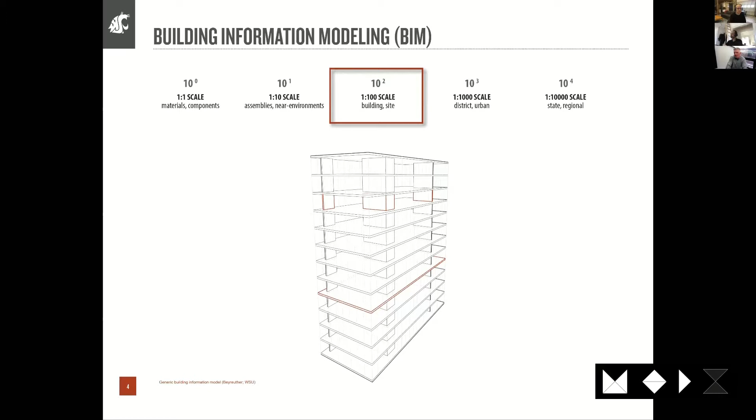So what is that appropriate balance between a certified assembly or an optimized assembly in manufacturing and still enable that creative freedom? And I know this is where I'm really interested in the modular world, where often we set those constraints early on. It shall be 14 by 65, right? Feet, right? To go down the road.

Yep. And then what we won't talk about so much today is a lot of our focus on both urban scale, on districts, on planning, and so forth, as we get into some of the new codes for mass timber, but then also that political level at the states and the bioregional level when we get into more of the environmental impacts and so forth.

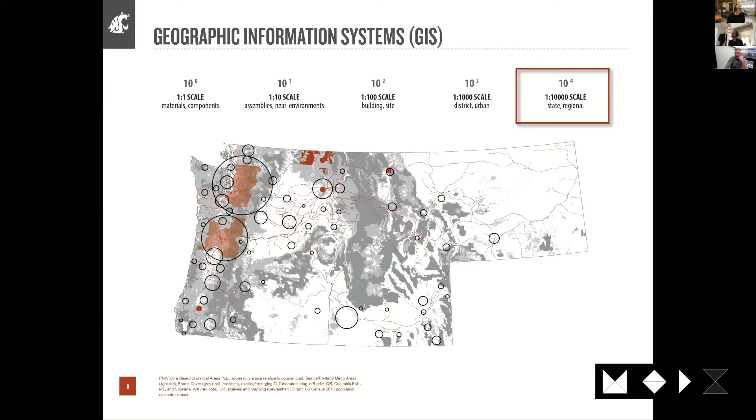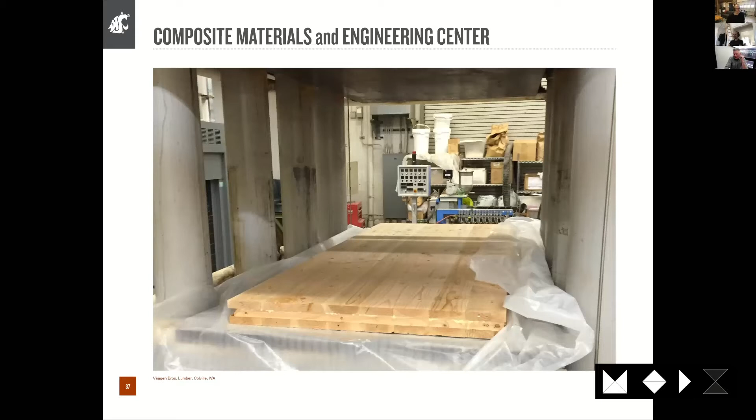So lots of glue and wood back at WSU, the material scale, the assembly scale, a lot of seismic work that's done on NSF projects. It was really a great time to be there in the early, like 2010 to 14, so that we can get back to this building scale and this decoupling of that assembly and system and whole building design. And that's not just structural, of course. It's energy, it's carbon, and understanding the opportunity with mass timber,

and the way that I always taught mass timber to architecture engineering students was, the first day of architecture school, at least for me, I was given a bunch of cardboard and an X-Acto knife. And that's how we started to explore space through that scale, which is really an assembly scale, right? We weren't given a bunch of sticks and told, put studs and top plates and so forth together. It's look at these planar elements and create volumes and explore what you think that experience could be.

So I really think when people ask why is mass timber attractive, especially in architecture, a lot of it comes back to that ability to really deal with those planar elements. And then getting into some of the more robust plug and play ideas, and I'm showing student work here purposely. This is from 5 or 6 years ago at WSU. We have this little army now of mass timber parametric architects and engineers out there. It's been great to watch them grow in their careers.

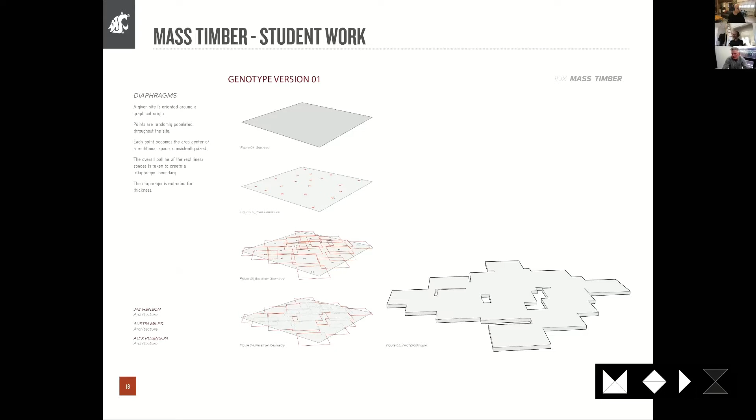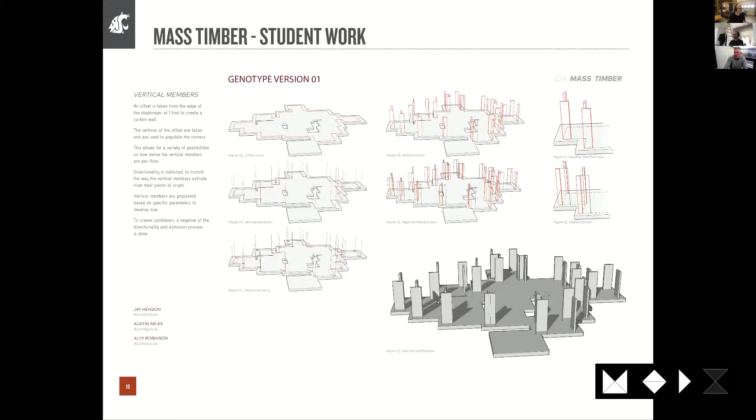But really, these ideas that these elements are ideal for parametric modeling. We can create a certain level of standardization with these piers, these walls, these diaphragms, but still have a lot of flexibility in how stresses and forces and stiffness move through that building.

So really that's kind of the basis for where I am right now with creating this glorified catalog of parts that can be used straight out of, when I say catalog, that's of course digital, and focus on all the different metrics, the metadata that carries throughout that supply chain. So that's really where my head is these days.

Yeah, that's an important distinction, I just wanted to add, Todd. It's really exciting stuff. We talk a lot about design for manufacture, but the idea that you're in the position that you've been able to develop design for manufacture for design, or thinking about how to develop systems around how designers will use those systems. If you go back a few slides, it's pretty impressive. A few more.

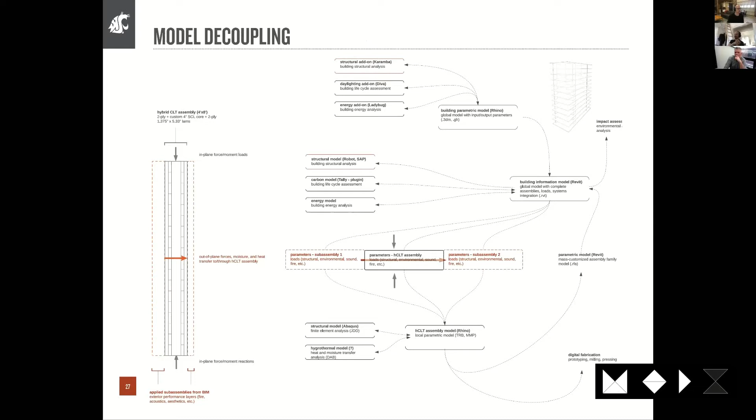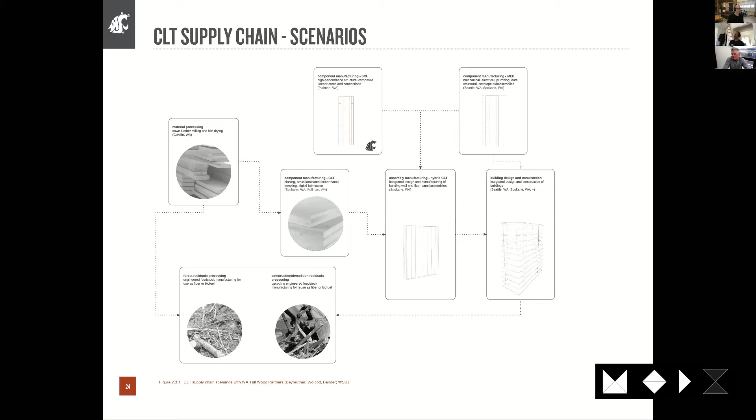This one, yeah. So your analogy of the foam core or the cardboard, that these components are pre-designed not just for manufacturing, but for the design process itself, is actually fairly rare in the current building industry. Architects don't understand the manufacturing process. Contractors don't understand the manufacturing process. Manufacturers don't deal with assembly. They don't deal with design. So it's not just that we don't have vertical integration. We don't have a system that works within vertical integration.

So not just the scalar aspect of the territory and the material science, what's really impressive here is the sort of disciplinary translations that you're doing. Maybe talk a little bit more about that and how that process has evolved.

Thank you for that question, Ivan. It's been the hardest part, and it's the part that I'm most excited about. As we've established capacity in the supply chain, both at the mills and now in the mass timber factories, I think people will be surprised at the level of technology that's now integrated into North American mills and into CLT and glulam factories, that these ideas of parametric and performance-based design are just ripe to jump into.

In fact, one of the biggest challenges I've experienced in my career as I've moved back and forth between the public and private realms is getting beyond prescriptive design. We know 95% of our buildings are built in prescriptive manners, whether we're talking about code or engineering. With some of my public hats, I'm involved in planning efforts, plan commission, and state building code council, and these are the constant discussions we have, whether about energy, carbon, or structure, of trying to pair up prescriptive and performance-based design.

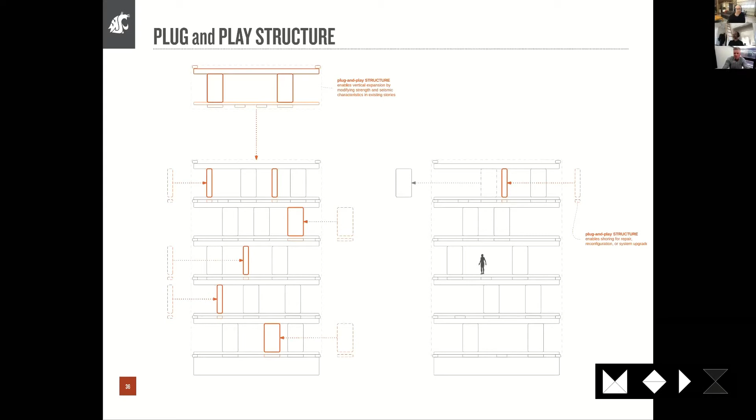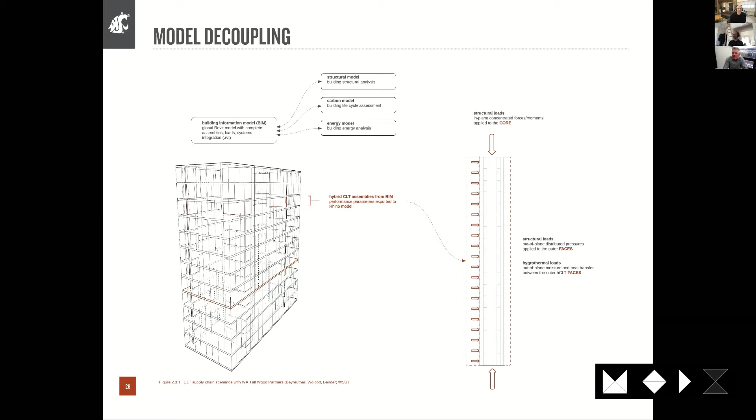Todd, this is really interesting. I think that was a good stream of discussion items on design for manufacture and assembly, and also manufacturing for design. Could you go back to your second slide on supply chain? I want to ask a question. Here? It was a diagram, I think it was the second slide you showed. There we go. Okay. Yeah.

Something that we talk a lot about in supply chain management theory is ultimately questions about value creation determine the supply chain path that one might choose, right? So every situation is going to be a little different, but if we look at, say, supply chain number 4, and in your experience, this is as interesting for volumetric modular as it is for prefabricated enclosure panels, as it is for mass timber structural solutions, which is what we're looking at here.

Where in this supply chain, say for supply chain 4, harvesting, milling, panel pressing, subtractive manufacturing, additive manufacturing, systems integration, where would you say would be the greatest value creation for the end product, which is the habitable building? For a developer or for society at large, where along that path is the greatest value created? And therefore, you can start to track where's the greatest potential enterprise and business opportunity along that path.

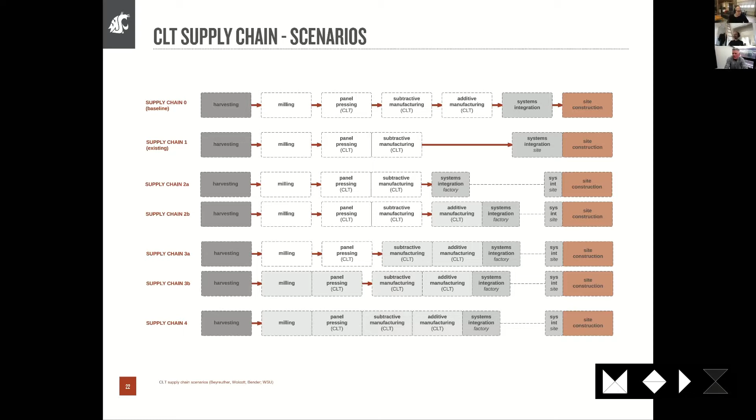Yeah, where do you place Mass Timber Systems, your new enterprise? Obviously we can see the history of what you've done at WSU, looking at harvesting, milling, supply chain, and then at Katerra with developing capacity really in panel pressing and subtractive manufacturing. And I'm sure they're looking at increasing their suite of integrated services there. What do you see Mass Timber Systems trying to do in this supply chain?

Yeah, so I think it is represented by the orange here. The physical manifestation of that, if we want to call it that, is that secondary manufacturing. It is an actual facility that contributes off-site to that. And then whether or not it moves into on-site assist or simply coordination is another question. But then in each one of those orange arrows, once you center in that space, being able to now really drive those specifications both upstream and then make it more accessible downstream.

And that can look like many things, of course, right? That can look like literally a catalog, or it can look like more robust integration into a partner firm's catalog, which we know is digital. It's building information modeling, it's parametric scripts, and so forth, right? But they're really optimized in that orange box right here. Mm-hmm. So it's not additional CLT pressing capacity, but it's this additive manufacturing systems integration piece.

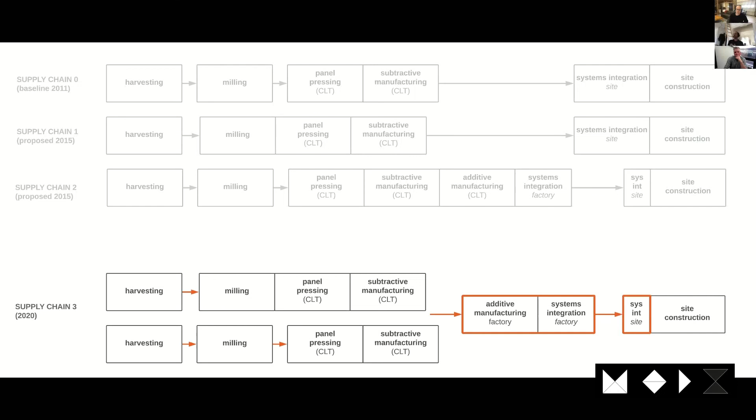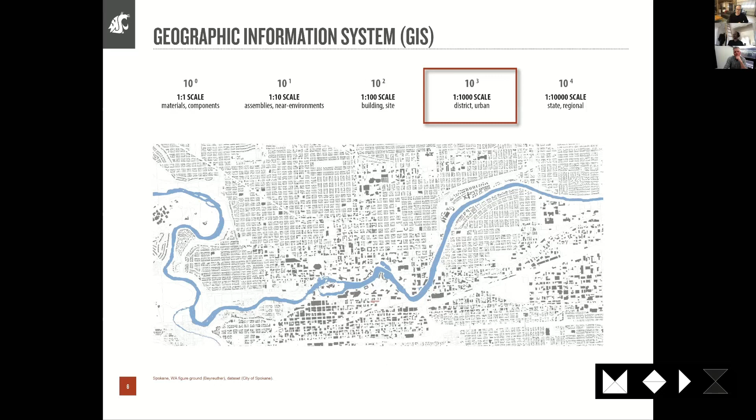How do you then teach someone to care about things that they honestly haven't cared about, or they don't see their comfort zone in? And how you really jump scales, as your diagrams suggest, is something that surprisingly is difficult at first, and then it becomes very empowering.

Mm-hmm. It's great to hear, because it always surprised us when we would do a GIS level network analysis, how do you connect a mill to here, and drive times, and how much carbon, what are the emissions, and so forth, right? And often it might be one of the architecture students that really excelled at that GIS level network analysis, where then we get down to the material scale and we start to break it down into, now it's not a structural pattern at the building scale, it's a material patterning.

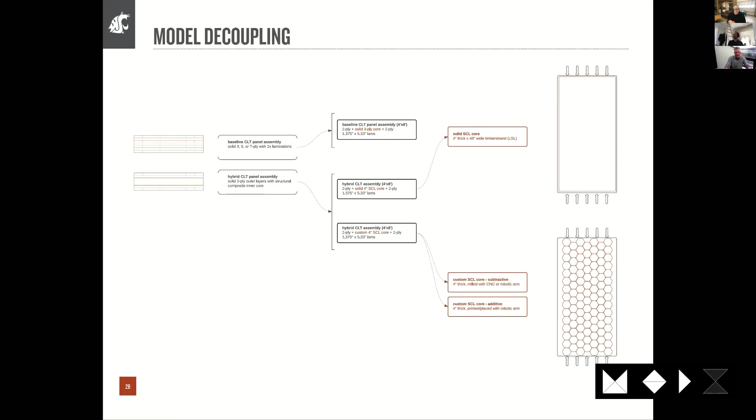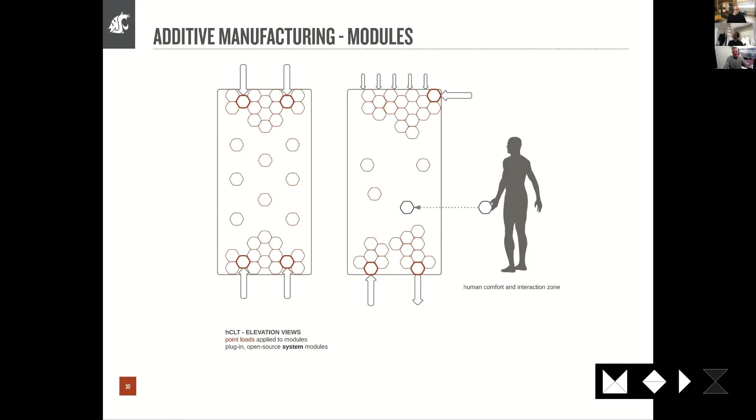What if you think about CLT as printing with rectilinear elements, or you take it down to nodes and you start to develop based on finite element modeling, and it's the same thought process, but you are scale jumping, obviously. And this was a USDA forest product research that we brought in a couple of students to really lead at the research level, and then you start to look at it both in terms of structural stresses, but also the non-structural integration. What if there's this junction box that starts to become that parametric scripting and so forth. So we really were able to touch and cater towards different strengths, all in this very familiar environment.

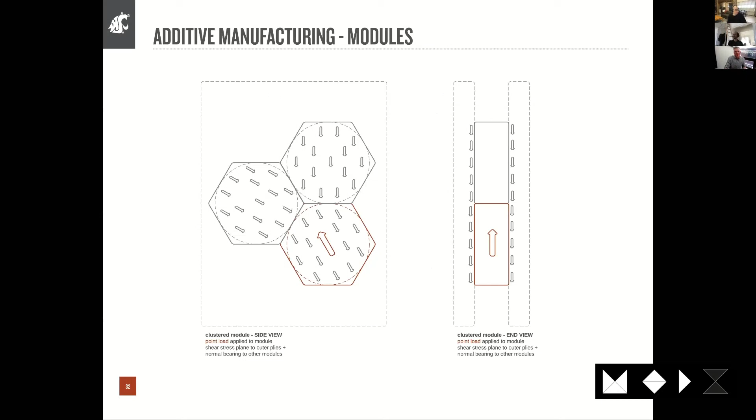Oh, that's fascinating. Yeah.

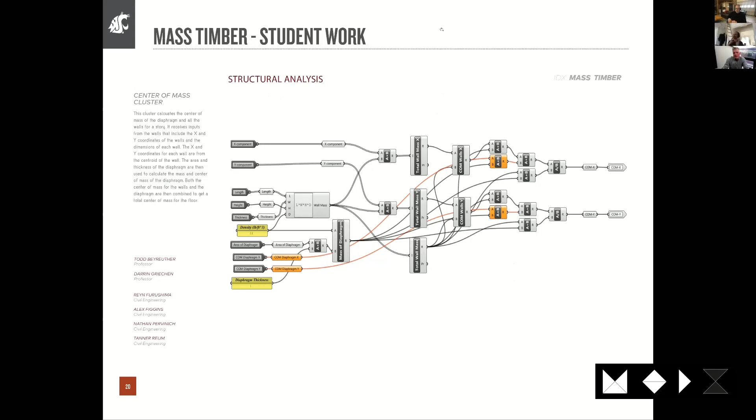So now, this is a really exciting time for you, Todd, and it's great to see the evolution from the pre-Katerra days, the Katerra situation, and now the new adventure. So where do you see the future of the orange box? Where do you want to be in 5 years or 10 years? Is it about changing standards? Is it about advocacy? What's the dream scenario for you?

Yeah, it is kind of fun to talk about it now, because that orange box is not just a private effort, right? I am excited to get back into entrepreneurship. And what I've always prided is that there's academic entrepreneurship and private entrepreneurship, startup culture, and so forth, and really being able to balance between those two worlds. Because if we look at it collectively, how do we get to the place where 5-10 years down the road, whatever our goal might be, whether certain interests would want to see more mass timber, for example, or for me, it's really getting to that ability in the next 5 to 10 years to now go design.

It feels like a certain investment for the last 10 years that's been engaging and exciting, but I haven't actually sat down with my pencil and my Mayline and gotten back into that design groove, right? So it's enabling that, but along the way, bringing the appropriate things into the public realm so that we can accelerate this market diffusion, and so I'm as excited about getting in the lab and picking up some of that work, and meanwhile commercializing it so that we keep that momentum going in the public realm.